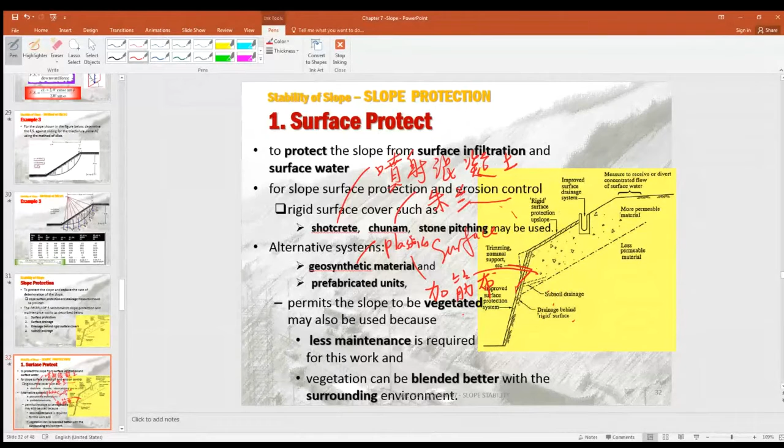Planting the grass over the slope surface, or even planting trees or shrubs, you know, the small and low trees, sometimes called shrubs, right?

And also you may apply the hydroseeding. You know what's hydroseeding? 噴草啊.

Now, when you develop and install the vegetation on the slope surface, you no longer need too regular maintenance for this slope, so it could be a very good, green, and aesthetically appealing measure for slope protection. Or you can blend or mix different types of plantation so that the environment could be more pleasing to anyone. So that is a very good and green measure for this kind of slope protection.

Now we come to the surface drainage. As far as this surface is impermeable, that means the water cannot penetrate into the slope surface. So any rainwater falling down on the slope, what will happen? Because it's not permeable, so the rainwater will go

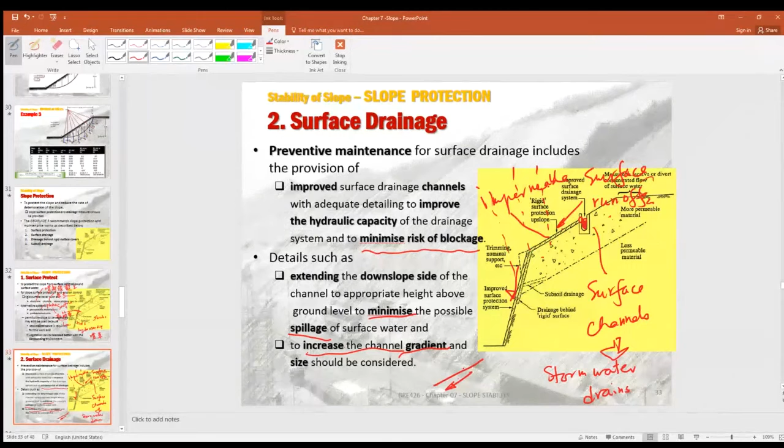Now, to prevent failure in the slope due to the seepage flow. You know what's seepage? Say here, right? Rainwater falling on the top of the slope, now this rainwater may seep into the slope interior.

So you have to provide a rigid surface cover. You can apply a rigid cover so that the rainwater cannot penetrate into the slope. So you have to provide a rigid surface cover of the slope.

And you could also install the synthetic composite drainage material behind the rigid cover. In other words, instead of a rigid cover, a concrete layer, you apply the synthetic, geosynthetic membrane.

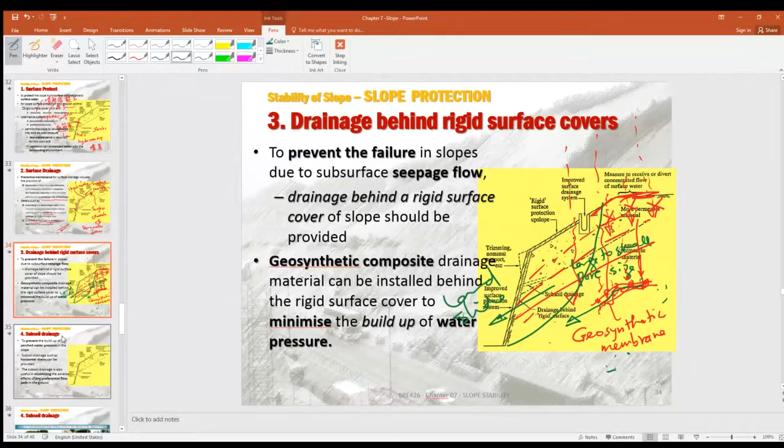Any question? Are you happy with the explanation for this slide? Do you understand my explanation? Yes or no? Good.

Okay, now I continue with slope protection. Here we come to the subsoil drains. What are subsoil drains? It means below ground level, right? Subsoil drains.

Now you can see here, that's the subsoil drain. In other words, for any groundwater, you want the water - any water, say here, the groundwater table here, right?

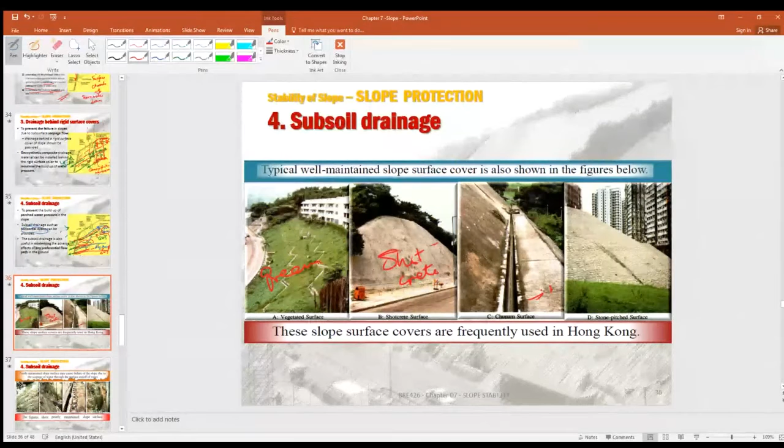And here's the green vegetated slope surface. And you have the chunam, a very old style, no longer used nowadays - chunam is obsolete. And here is stone pitching, where individual stones are packed together and joined with cement mortar.

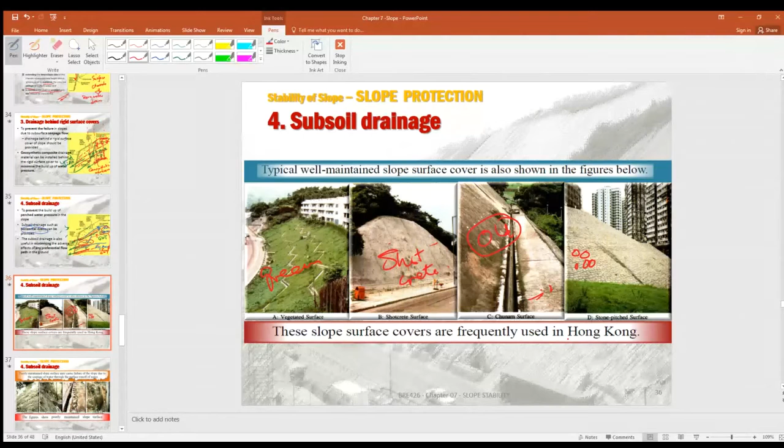And here's the subsoil drains. So if you have surface runoff - too much surface water running over the slope surface - and if the rainwater stays on the slope surface for a long time, it will start what we call erosion. Soil erosion means individual soil grains will be carried away by the water.

So over years, a lot of soil has been eroded away. In other words, the soil particles will be transported from one place by the water down to the surface channel or even into the public sewer. That's no good - we try to make the soil stay there. There should be no erosion, no cutting away of the slope in any part. So we have to stop the soil erosion, and that's why you have to properly maintain your slope surface.

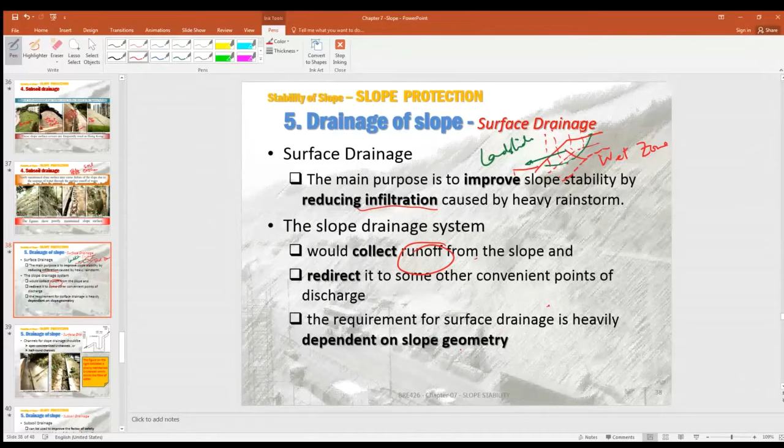So slope drainage design aims to collect the surface runoff from the slope and direct it to convenient points of discharge. You have to design surface drainage very carefully to meet the given slope geometry. Depending on the slope geometry, you have to install different surface drainage systems for your slope.

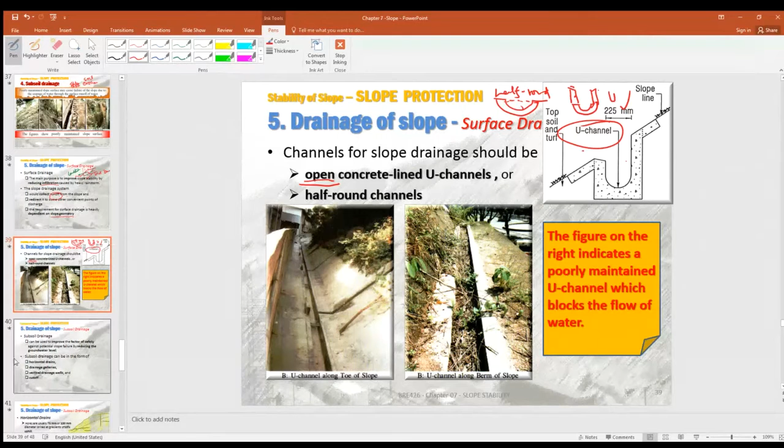For the subsoil drain, it helps discharge water from the interior of the soil mass or behind the slope. It could improve the factor of safety significantly by reducing the groundwater pressure, as we discussed in the previous slides.

The drainage gallery means a tunnel - some sort of tunnel. You have packed some stones all around, or even concrete, and then you have water inside. The water will be collected by this - all the groundwater will be seeping into this tunnel. That is the drainage gallery.

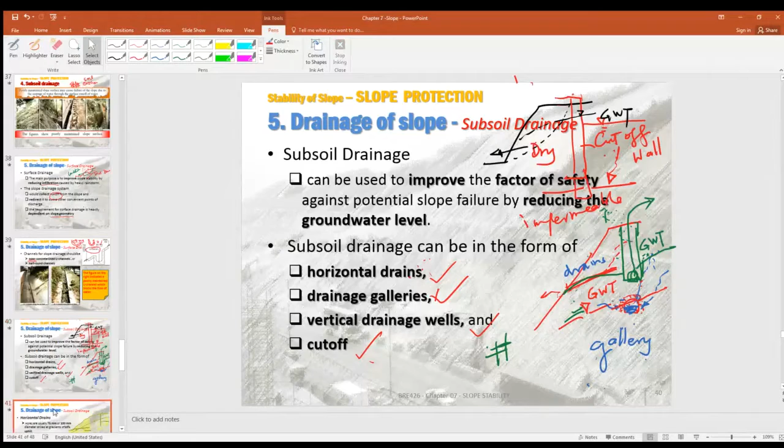Drainage of slope. Now, you have to know this word: perforated. It means you've got many holes there, perforated, right? It means a drain where the surface has many holes or slots, so that the water could go into this horizontal drain. You have to allow the water to go in the horizontal drain, otherwise it is completely ineffective. So that is the perforated.

Or sometimes you have the slotted casing. What means slotted? You have this slot, so the water could go through these slots. Perforated or slotted casing, okay?

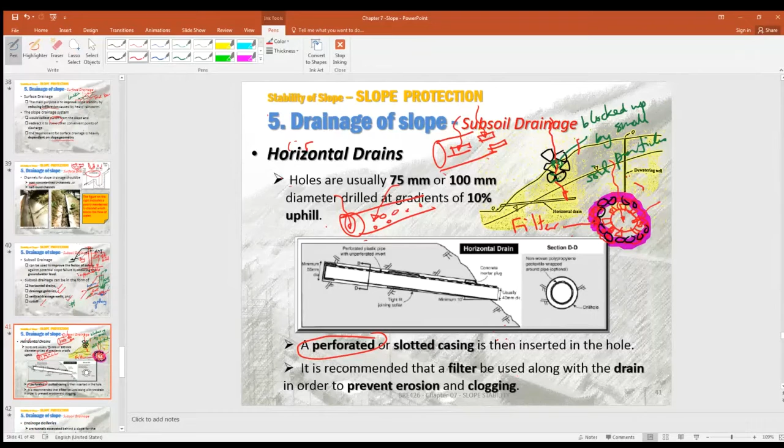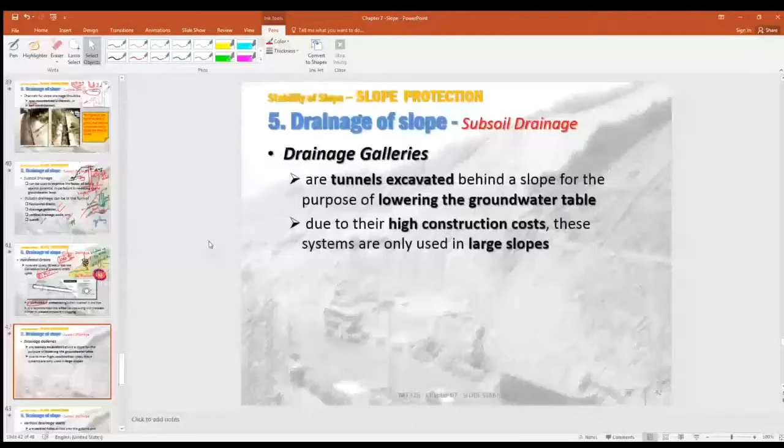Drainage galleries, I have talked about that. It's in fact a tunnel which will be used to lower the groundwater table, of course the cost will be very high. And here's the vertical drainage wells. You can see here, you have to pump the water out of the dewatering well. So after pumping, the original groundwater table will become that.

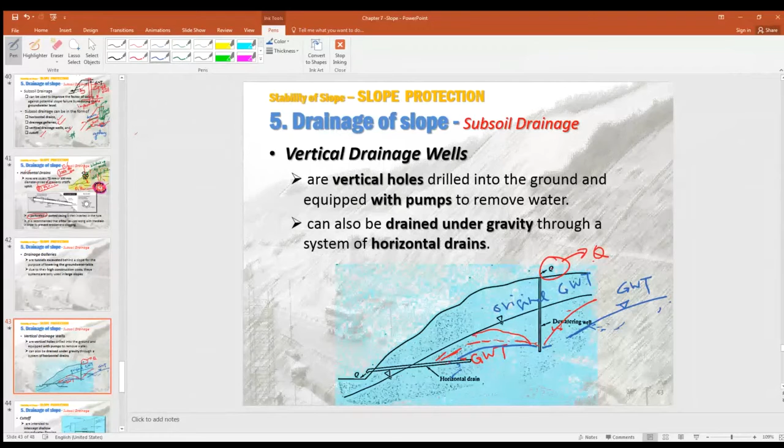The groundwater table, right? Or even, for the best result, the GWT - so the original groundwater table has been lowered to a much deeper level. Now that will make the sliding of the slope becoming less possible, because the groundwater has been lowered, so the failure of the slope becomes more impossible.

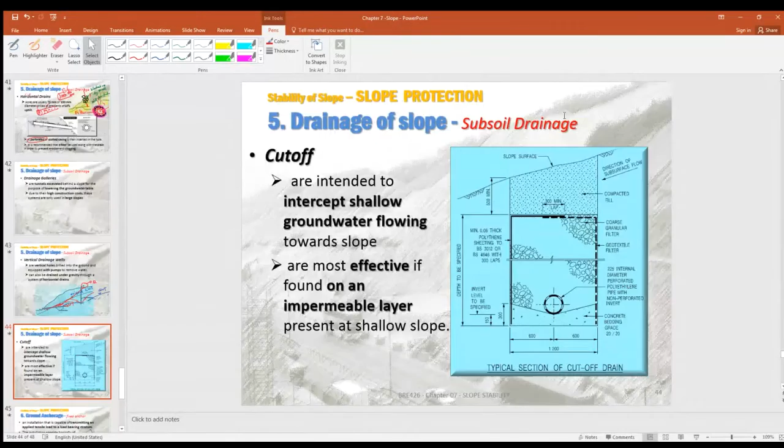And cut off, here's the cut off. We'll talk about this - you can have an impermeable wall. Now here's the impermeable wall, and if there's an impermeable foundation under that, so this cut off - this cut off wall. Now, the actual construction of the cut off wall could look like this one.

You can see the upper part is the compacted fill, so it's very dense. Okay, and then you have the perforated drain, the perforation. And then you have it surrounded with - you can see here what, the polythene, right? Polythene sheeting, impermeable. And then you have the filter material, the filter.

What's the filter? It's the granular filter. What's the best filter material? A good selected range of large to small particles, and well packed.

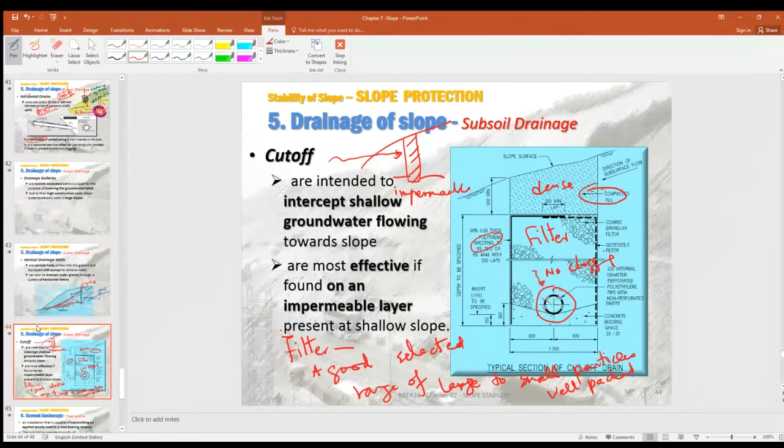First of all, you have the impermeable polythene sheeting, and then you have the filter material, filling all around your horizontal drains. Of course, the cost could be quite expensive.

Now we come to a very expensive measure: to improve a slope by means of mechanical methods. In other words, you apply the force to stop or arrest any movement of the soil, for a cut slope, a very high cut slope. So let's take a look at that. Suppose you have a very high slope, then you're worrying about a possible landslide for this slope. So you have to provide the anchorage.

So when the slope is going to move, what will happen? This will provide a supporting force to stop that sort of movement. So that is the tying down - it's the ties or anchors. It provides anchor force to stop the downward movement of this big soil mass for this slope.

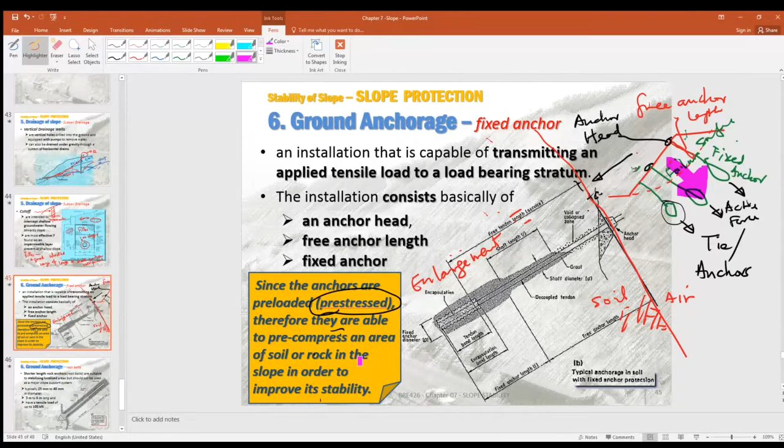Now, if you have installed a pre-stressing - here's the pre-stressing, that's the word. Pre-stressing means you apply a force at the start so that you have an active force there. In other words, before the slope starts to move, you already have an active force there - that's the pre-stressing force. So that will give you a very good stabilizing force, which will be pressed beneath the failure surface. That will give a very stable supporting force to keep the soil mass stable, so that will prevent any landsliding movement of the slope. So that is the pre-stressing force.

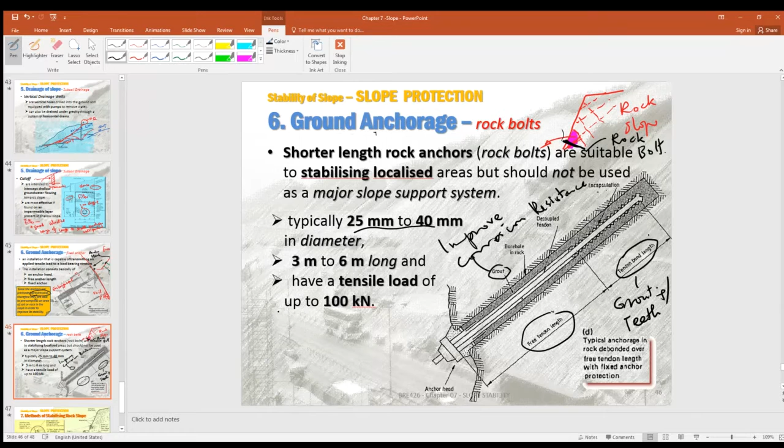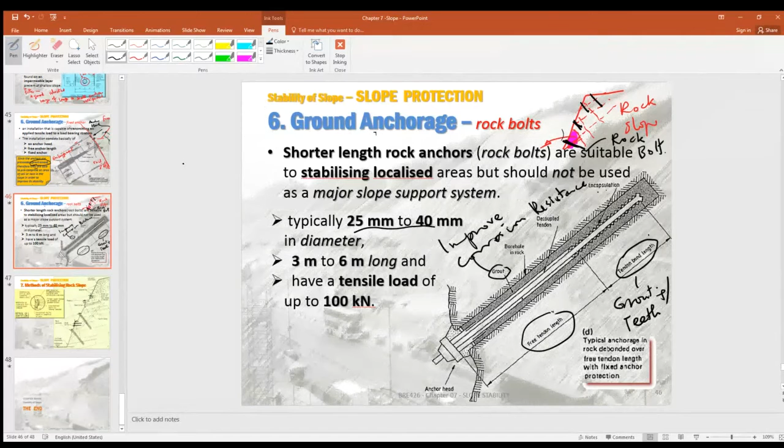The grouting is going to protect the metal surface from corrosion only, despite they are not designed to give the structural strength to support any rock fragments. So it's typically about 25 to 40 mm and 3 to 6 meters long. You could have up to 10 tons. So that is the purpose of the rock bolts, to anchor pieces of very loose rock from falling down. You do need a rock bolt there, in order to prevent the loose rocks from falling down.

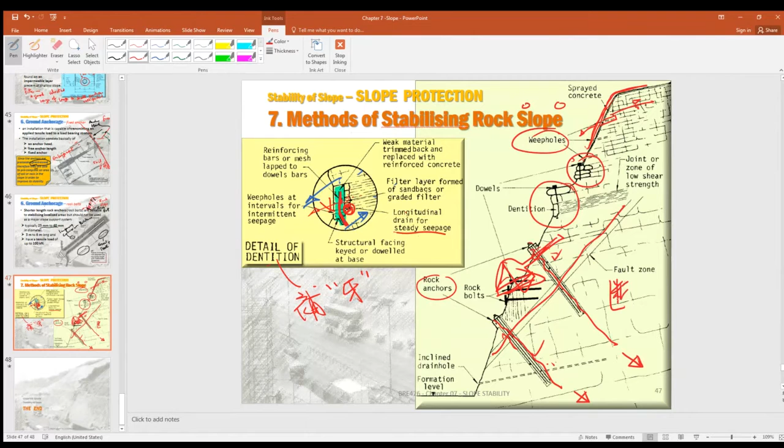Fault zone. Okay, I think I have finished chapter 7 on slope stability.

Now let's talk about the learning outcomes of this chapter. After this chapter, you have to know how to identify the various types of retaining wall systems. In other words, how many kinds of different retaining walls are there. And also you should be able to analyze and design some common retaining wall systems. Of course, we are referring to very simple retaining walls, because there are so many different kinds of retaining wall. Some retaining walls are very complex to deal with. We are not going to do those types of very complex systems.

Now, retaining walls are almost regarded as vertical or near vertical walls that could retain a certain height of soil or rock. Of course, for very strong rocks, you don't need any retaining wall at all, because the rock could stand up for a certain height, and you don't need any additional wall to support that rock slope. But for some situations, we could have very weak rock systems, so you have to build up a retaining wall strong enough to retain those rock masses because of their inherent very weak mechanical properties.

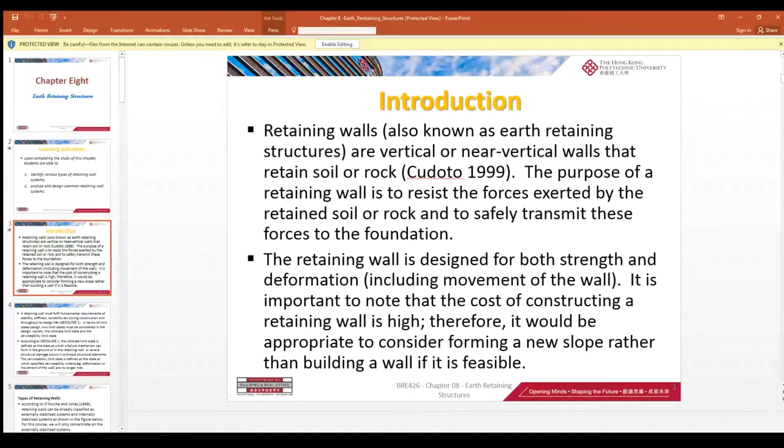The purpose of the retaining wall is to resist the force exerted by the soil. You may recall the lateral earth pressure we discussed in chapter 3 or 4 — the active pressure coming from the back of the retaining wall.

So you have the lateral earth pressure, both active and passive. This pressure gives rise to horizontal forces. Whenever there's a very high wall and a large horizontal force, it tries to overturn — toppling, tilting, overturning the wall.

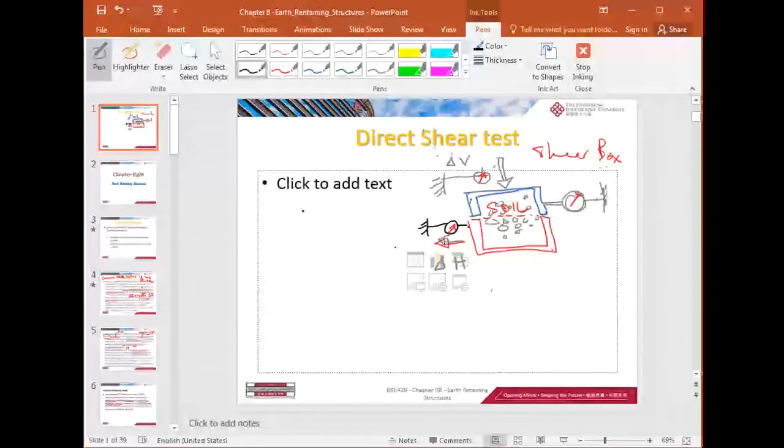It means that the soil in the upper part will be moving... the two pieces will be moving relatively in the middle, by sliding or by shearing. Is that okay?

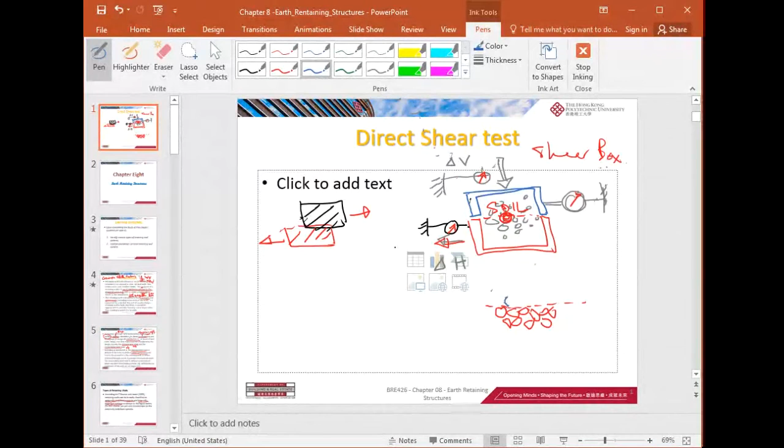Now let's take a look at these pieces. Let me draw. So that is the upper part, and that is the lower part.

This one is going to move towards the left. Relatively, it's moving towards the right. So there is a dial gauge here to measure the movement, the horizontal movement, delta H.

Now, of course, when the lower part is moving towards the left, it's possible that the soil may move in the vertical direction. That's why we have to put a dial gauge to measure if there is any vertical movement of the upper part relative to the lower part. In other words, it's possible that it's moving vertically and also moving horizontally—delta H, and that is known as delta V. Is that okay?

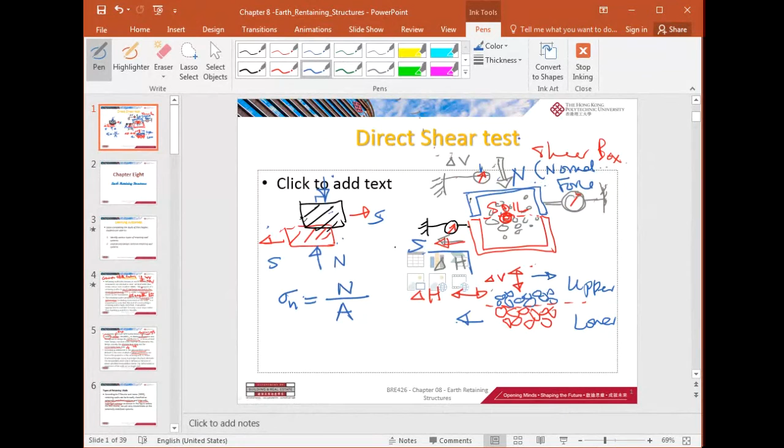The normal force, and here's the horizontal shear force, S. So that's the normal force. What's the normal force? Normal stress, sigma n, is equal to the normal force divided by the area. What's area? This area.

What's the area? The shear box area. Here for our test it is 60 mm times 60 mm.

Now the normal force will be given, so we will apply a set of loading. That will apply a normal force, trying to press the upper part against the lower part. Now, you should be very aware that if N is higher, or sigma n is higher, then the shear force will also be higher.

And what's the shear stress? The shear stress is equal to what? Shear force over area—the same area.

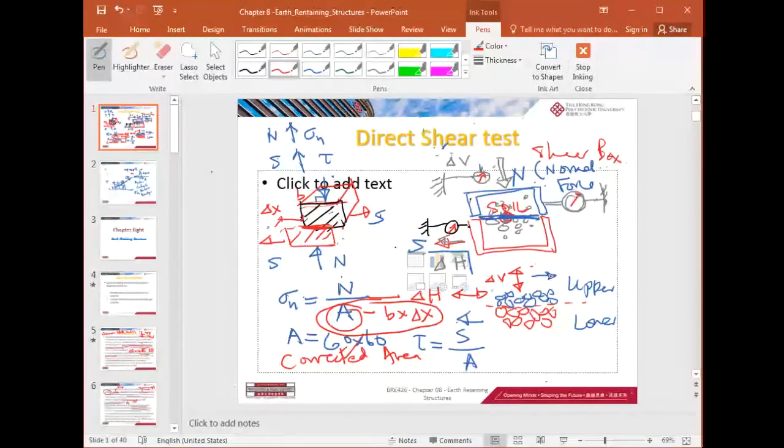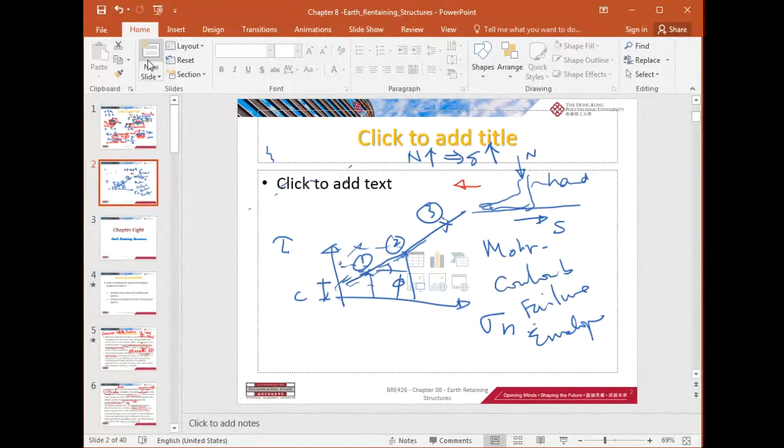Now let me tell you some subtle things about this. At the beginning of the shearing, what will happen? What will happen? Under very heavy, very big normal force, what will happen? When you start to... you can see here, these three pieces.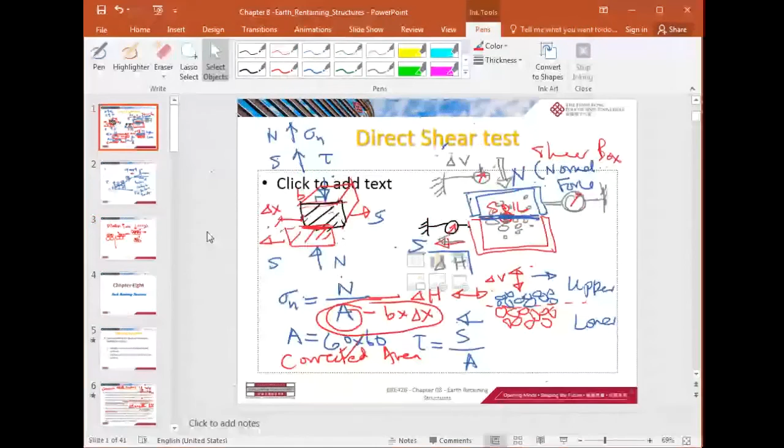It's called the dilation, a very important concept, because the soil particles will roll over. The upper one will roll over the lower soil particle. So there will be an upward movement, or increase in volume, in this shear test. Can you imagine that?

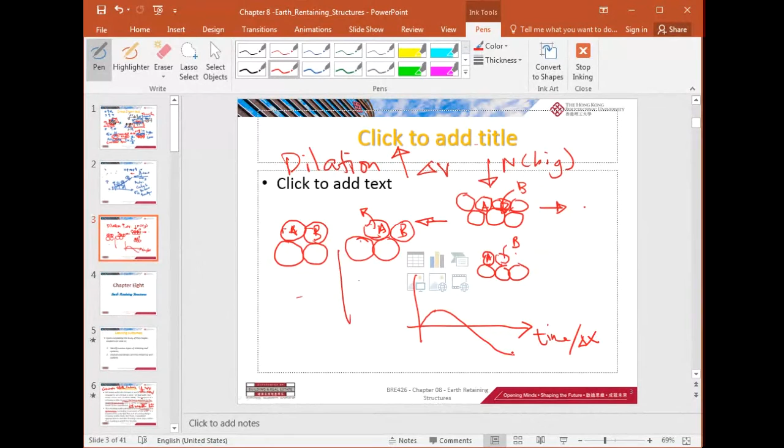In other words, when you plot the movement against time, or delta x, there will be an increase before it goes downwards. That is the delta v, the delta v will go firstly upwards, so there will be an increase in volume here, before it will go down again. So you should notice the dilation here.

Now, here you got 3 tests, remember that. Test 1, N1, or the sigma N1. So the sigma N1, and test 2. So you got the shear stress here, tau 1. And then you have test 2, sigma N2, and then you have a bigger one, sigma N3. Okay, you got a bigger sigma N3, and you got, here, tau 2, sorry, tau 3. So you got sigma N3, that is sigma N2, sigma N1. You got what? Tau 1.

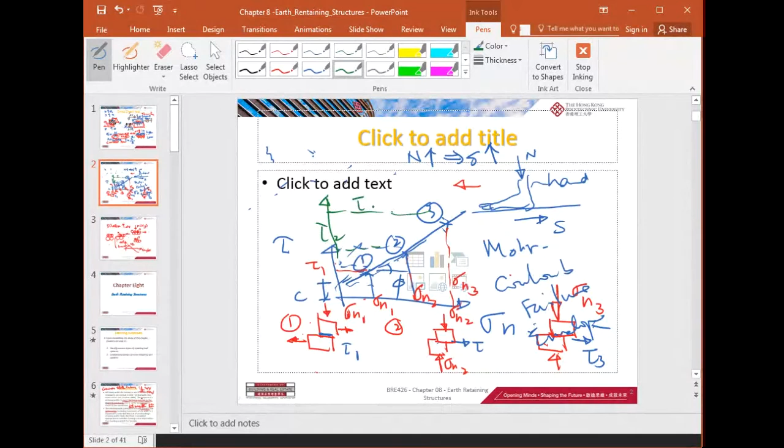Okay, tau 2 and tau 3, right? Can you follow? Apply increasing normal force, right? So you will be having a higher normal stress, and you measure the shear stress.

Okay, if that's okay, we will look at the video. Remember, there are three instruments to record: the horizontal movement and the vertical movement, and also the load, the shear force. How much is the shear force needed to keep the upper part and the lower part sliding against each other.

Can you see the picture? So there are three measurements. At a particular normal force, you have to measure the horizontal movement, the vertical movement, and the shear force required to shear between the two pieces.

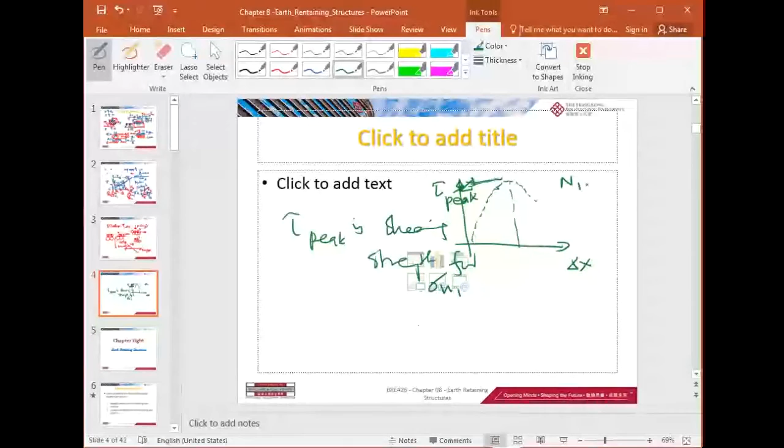So that is the peak. Peak is the shear strength, for sigma n1. Because here the normal force is constant throughout the test, it will give you sigma n1. Okay, say for test 1.

And then you come to test 2. Again, so what do you have? A much higher value, because you have a bigger normal stress, so you get a test that is the top one, and you have tau 2. Okay, similarly, you have test 3. You will have a higher shear strength because you have a higher normal stress.

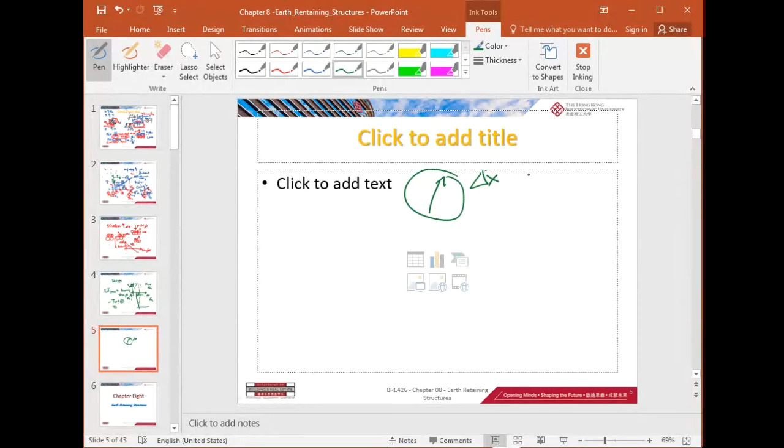Now, for the equipment itself, you have the dial gauge. For the delta X dial gauge, you can see from the video, one division is equal to 0.01 mm. And also for the delta V dial gauge, the vertical gauge, you can see from the video, one division is equal to 0.002 mm. And of course for the load, the shear force, you also have the shear dial gauge.

Now you will have the information, it's equal to say 1.40 something Newton. So you have this transformation between the division and the actual movement or the actual force. So you got this data.

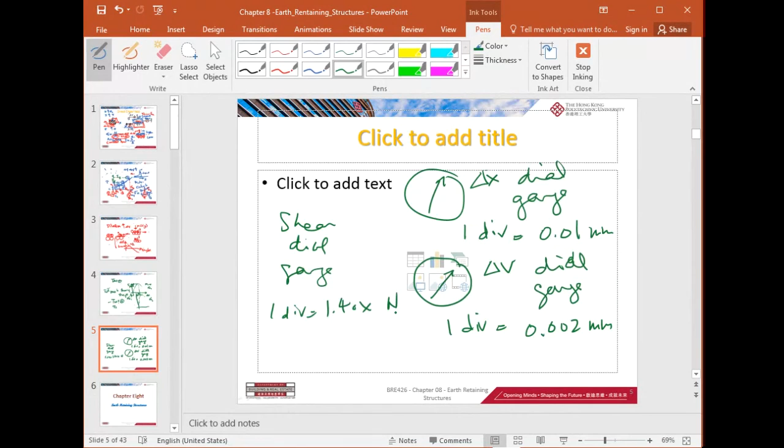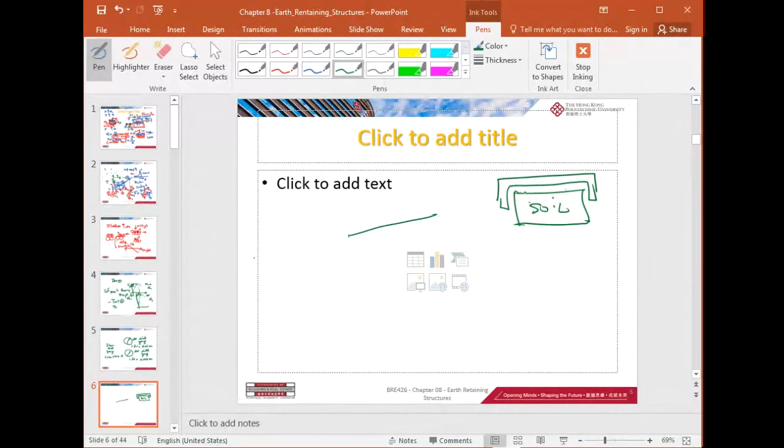And also for the soil specimen preparation, you have the shear box. This is the soil specimen. But between the box and the soil, you have these two pieces. First of all, because it's going to slide in that movement, you have to have some groove, so that it should look like that.

So that it will keep the soil and provide the grip between the cover and the soil specimen. Otherwise, the soil will go together with the cap. So you have to provide the grip. So the groove here is to grip the soil during the movement.

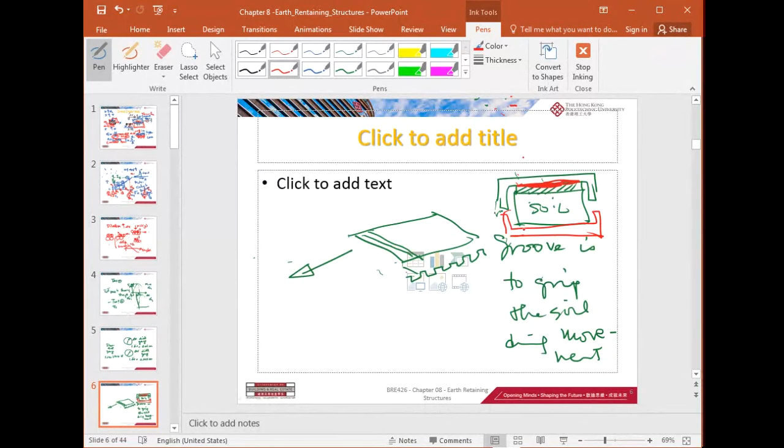Okay, and also at the top, or even below, say here, you have additional material on top of the metal plate: a porous layer to allow drainage of the water during shearing, to let the water go out of the soil, so that the loading will not be resisted by the water pressure, because any water under compression will be freely going out.

So there will be no water pressure to resist the loading. Only the effective stress of the soil is measured. Okay, so probably you have the whole idea now.

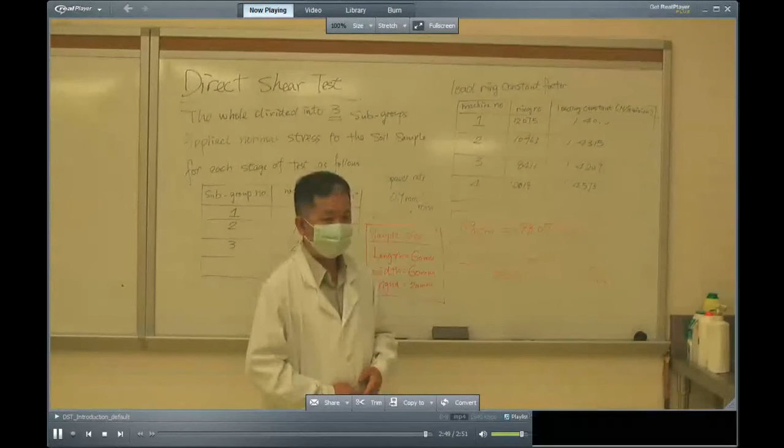So tell me, can you see the video with the voice? Okay. So there is a simple introduction to the shear test. Now we come to the test equipment.

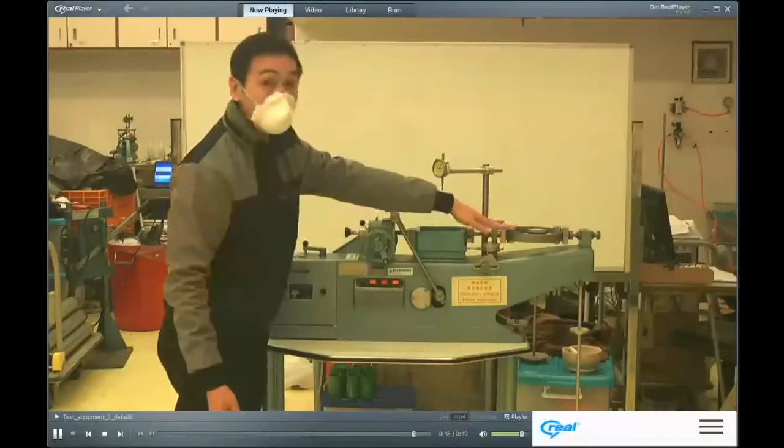So you have a brief description of the testing equipment. You got the shear box, you can see the loading frame, and you can see also the dial gauge, to measure the vertical displacement, horizontal displacement, and also the shear force.

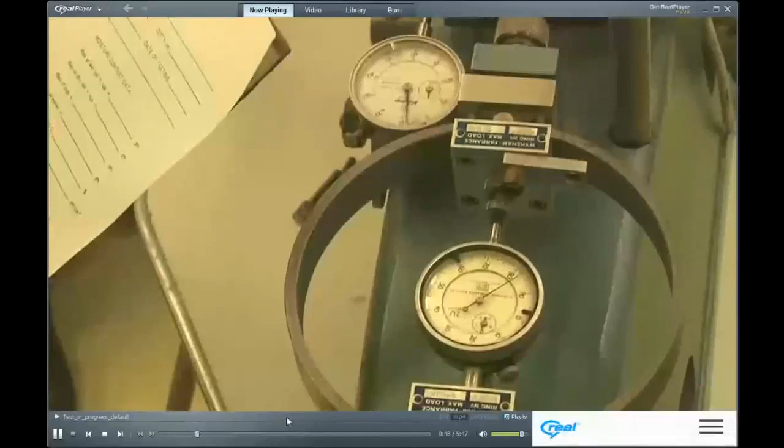Please note that the lower dial gauge measures the horizontal force, the shear force. You can see the proving ring, a circular ring, which gives you the measurement of the shear force. The gauge in the upper part of this video is the device measuring the horizontal movement. Notice the calibration between one division and the force, as well as the horizontal displacement.

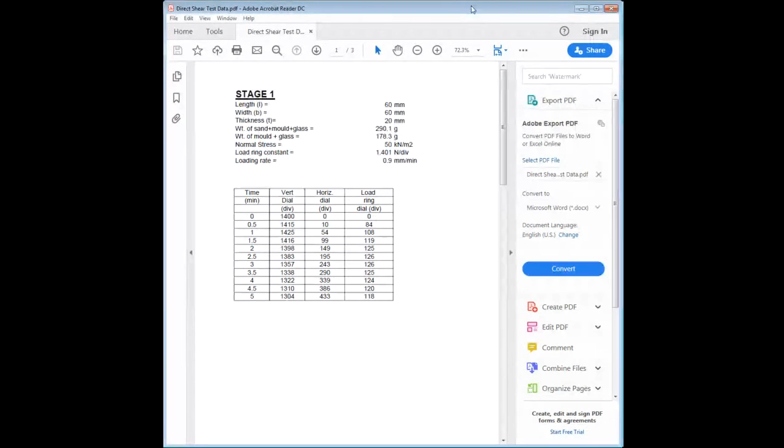For stage 2, what's the normal stress? 100 kPa. And for stage 3, you've got 300 kPa. So you've got 3 points: at 50 kPa you get a shear strength, at 100 kPa another strength, and so on. So you've got 3 points.

Can you plot the curve, or plot the straight line, to obtain the cohesion and also the angle of internal friction? So you've got all this data.

Each one of you, remember, this is not group work. For yourself individually, please do your own analysis and plot that curve, and report those data. We will give you some guidelines for doing the report. Please observe these guidelines very closely, because I was told there will be quite a high weighting on your lab report, in order to replace the midterm test.

Okay, everyone got the message?